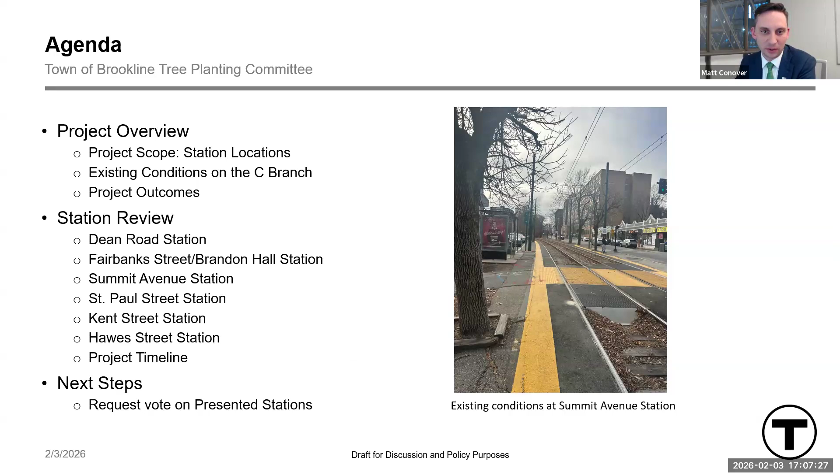As I mentioned, we were here back in the fall and presented the first 2 of the C Branch stations. Today we're here to present the same details on the remaining stations and to request the committee's approval. The MBTA has incorporated the lessons learned from the first 2 stations into the design of the remaining stations to ensure that the required accessibility improvements are made with minimum disruption to the existing environment.

Currently there are 9 inaccessible stations on the C Branch. Accessibility is a shared priority of the MBTA and the town of Brookline, which seeks to ensure a safe, livable community for all residents. The project will upgrade 9 stations, widening and raising platforms to meet minimum required accessibility standards. For those familiar with the service today, St. Mary's and Coolidge Corner are examples of stations that currently meet the accessibility guidelines I'm describing.

As part of this project, we will also combine Brandon Hall and Fairbanks Street stations into a single station, which will improve travel times and ensure that the new Type 10 trains can serve all stations along the branch. Lastly, we will eliminate Kent Street Station due to its proximity to Hawes and to further improve travel times. These significant improvements do require trade-offs, which our team has actively engaged with the town on. Working with town staff, elected officials, the public, and technical experts, we have gone through a series of options and refinements to balance these trade-offs and to develop a project that provides equal access to all and minimizes negative impacts to the maximum extent possible.

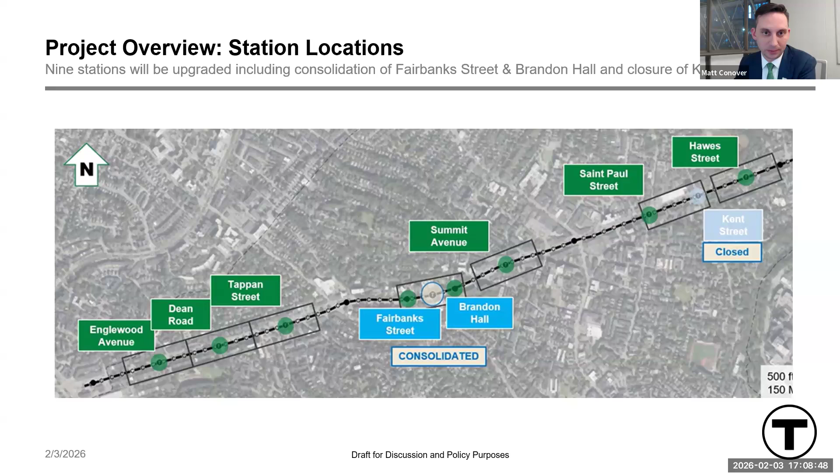For those familiar with the nine stations that I mentioned, the challenge of the existing conditions will be familiar. Our team has heard from numerous individuals who cannot access the Green Line from the station in front of their own home due to some of these challenges.

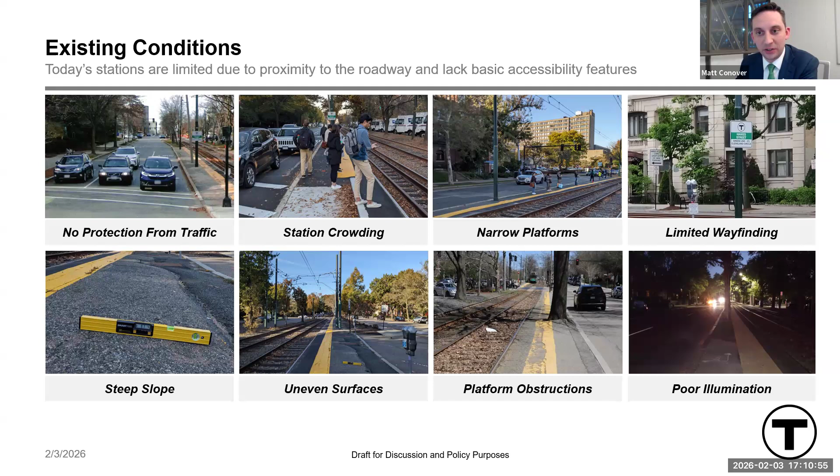This project will address the challenges that I just described. At the completion of the project, the entire C branch will be accessible. In working with the town of Brookline, we've designed a project that will preserve the look and feel of Beacon Street, which is a unique Brookline asset.

Through station consolidations, closures, and by shifting platforms to ensure accessibility and improve service reliability, the MBTA expects to see a 3 to 7% decrease in travel times. The project will bring improved wayfinding and lighting for customers.

In partnership with the town, we are minimizing the impacts to public shade trees, and we have developed a plan to replant consistent rows of trees along the Beacon Street corridor. We have done this by thoroughly vetting all station locations and platform sizing to ensure that the minimum number of trees are disrupted and the maximum number of trees are saved.

We've incorporated a row of trees, referred to as a tree lawn, at the back of the platform areas to eliminate impervious surfaces, reduce urban heat pockets, and provide a location for replanting along Beacon Street to create a consistent and evenly spaced row of trees where possible.

Lastly, in working with town staff and through various design changes, we have ensured that this project will not preclude the future bridle path, which I look forward to taking advantage of when I'm not riding the Green Line.

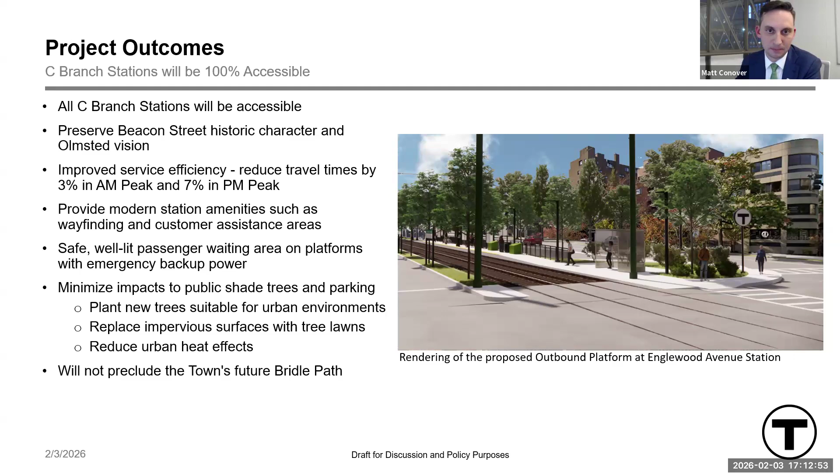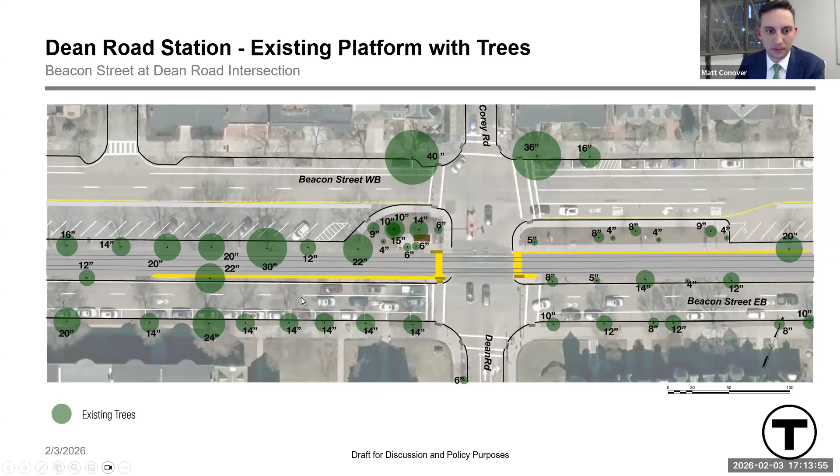As I'm sure many of you have identified, the platforms will impact a number of trees, most of which are on the new outbound platform side where it is being relocated. This is unfortunately necessary due to the hill present to the east of Dean Road.

One of the primary parts of making an accessible station is having an accessible path of travel. A big part of this is related to the slope of the path.

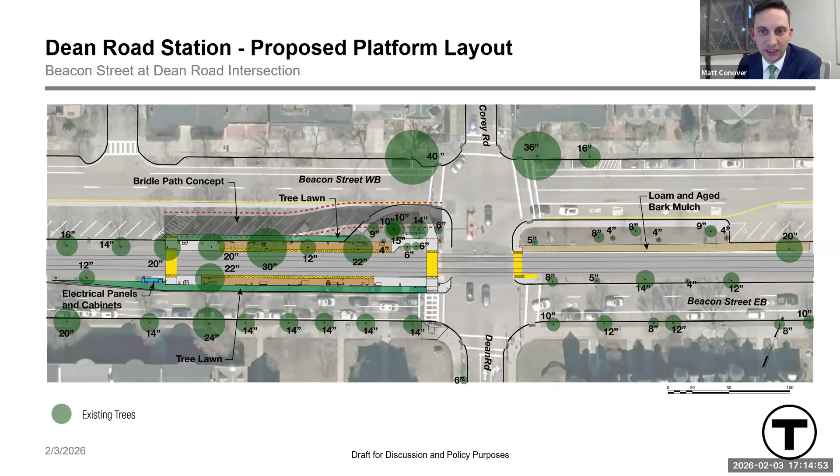The same situation is also present at St. Paul Street, where the platform can only achieve accessible slopes on the east side of the intersection.

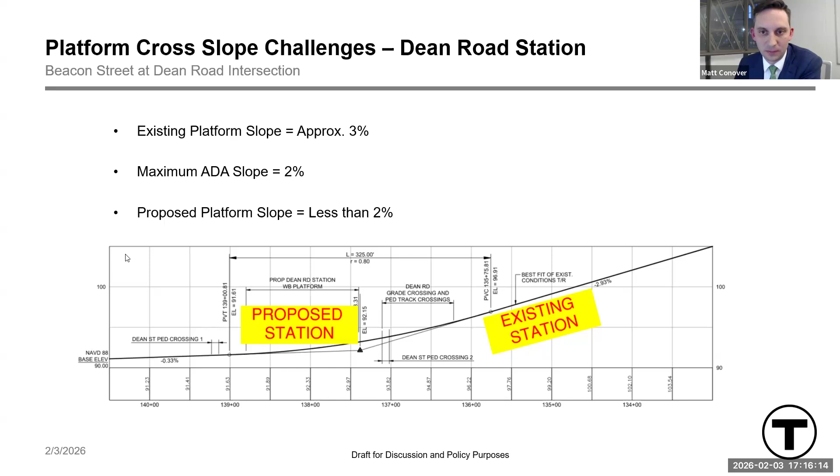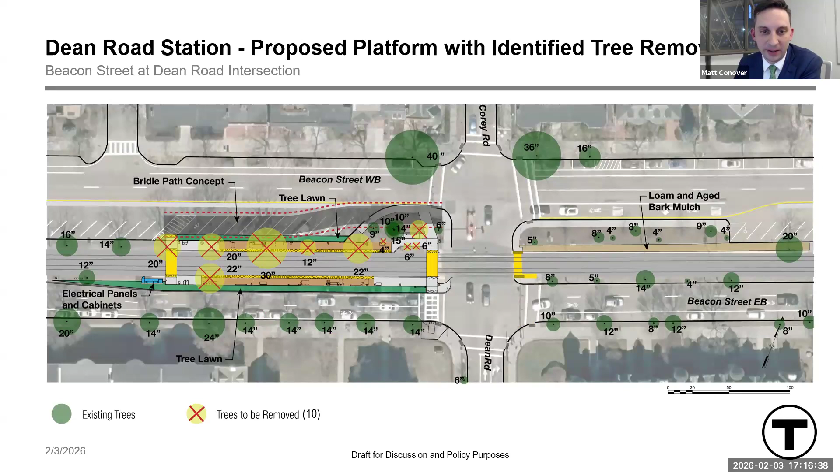The MBTA has committed to the town to do everything it can to maintain the character and green space along the historic Beacon Street corridor, and is hoping to leave the space overall better than when we found it.

Through close collaboration with the town of Brookline and their arborist, our team has developed a tree planting plan that is part of the presentation today.

In the area of the station, a total of 9 new trees will be planted. This includes a dedicated tree lawn along each platform to maintain the continuous green ribbon along the corridor. The drawing shows the canopy size of the trees after a few years of growth.

Then they will be turned over to the town of Brookline, as agreed upon, to become town assets. The new trees planted will be between 2.5 and 3 inches in diameter, as the project and town arborist have found that statistically, trees of this size have the best chance for success establishing themselves, and will often catch up in size to larger plantings fairly quickly.

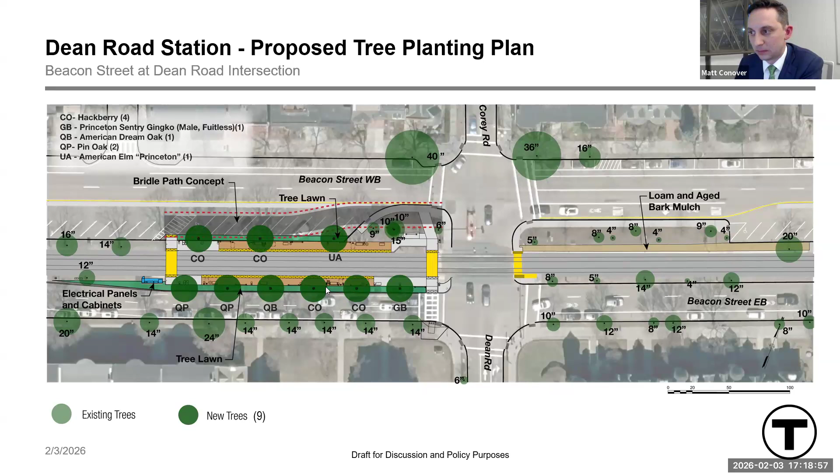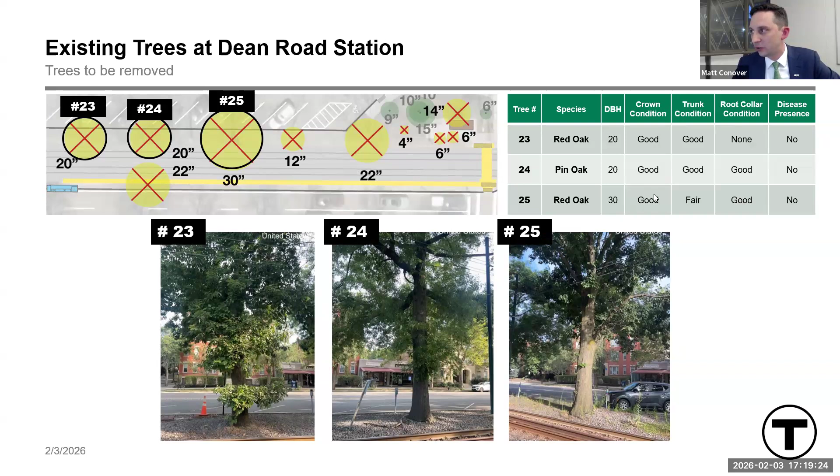Shifting down a little, we see 3 more trees, numbers 26, 27, and 29: 2 sycamores and a crabapple, ranging in size from 12 to 22 inches. All are in fair to poor condition generally, and some do have disease present.

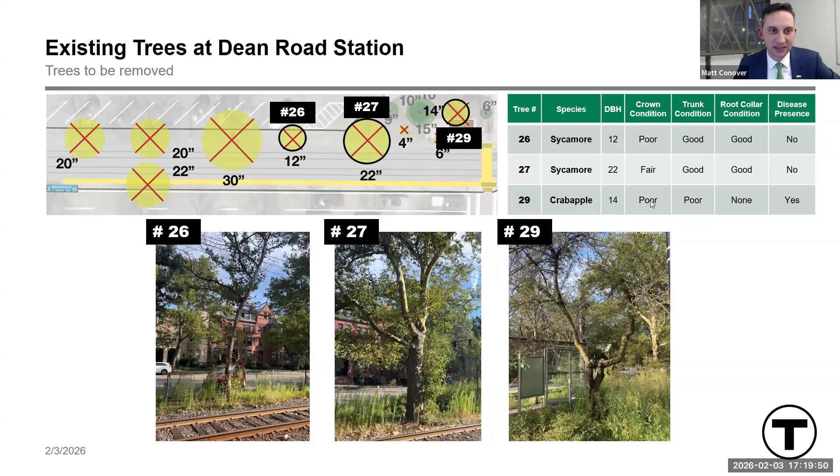Shifting again, we see trees number 31, 32, and 41: a Siberian elm, a pin oak, and a Siberian crabapple, ranging in size, 2 at 6 inches, 1 at 22 inches, 1 at 4 inches. One is dead, one is poor, one is good, and the other is to be surveyed in the near future for complete information. No disease present at this time.

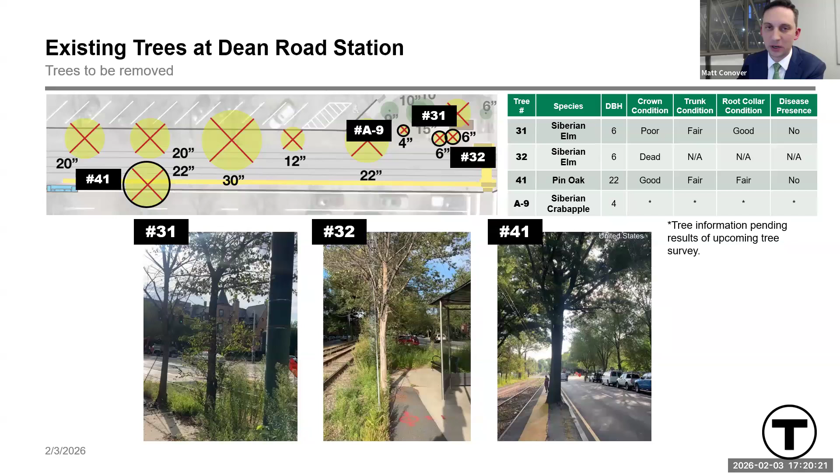With that, I'll move on to Fairbanks and Brandon Hall.

The next location is where Fairbanks and Brandon Hall stations are located. This location is a little different from many of our others, with a steep wooded slope to the northern side of the tracks. While not as close to traffic, these stations feature a smaller, thin strip of asphalt used as the platform. This adds additional challenges for providing equal accessibility across the station down this slope for those who live along the westbound side of Beacon Street.

Here's a top-down view of the area, Fairbanks and Brandon Hall stations. As shown, the stations are very close together, only a few hundred feet apart, with the wooded hill line and Beacon Street to the westbound side, to the north, and the angled parking along Beacon Street to the eastbound, and Beacon Street eastbound to the south.

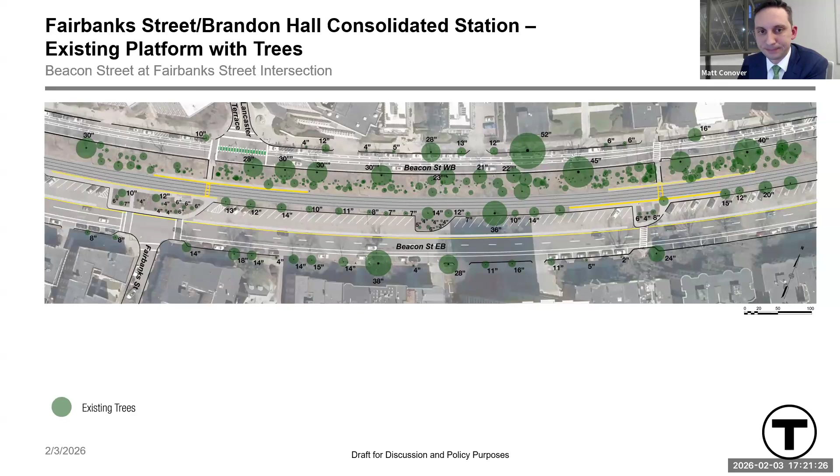In maintaining this, we'll provide equal access to the new accessible ramps, which will be installed adjacent to the existing stairwells and down the slope from Beacon Street westbound.

The project team worked hard with the town to find a configuration that worked for these ramps and minimize the overall impact to the trees. They reviewed dozens of options, including which side the stairs should be placed on, how long and wide the ramp should be, keeping towards the top or bottom of the slopes, using ramps instead of slope walkways, and different foundation types.

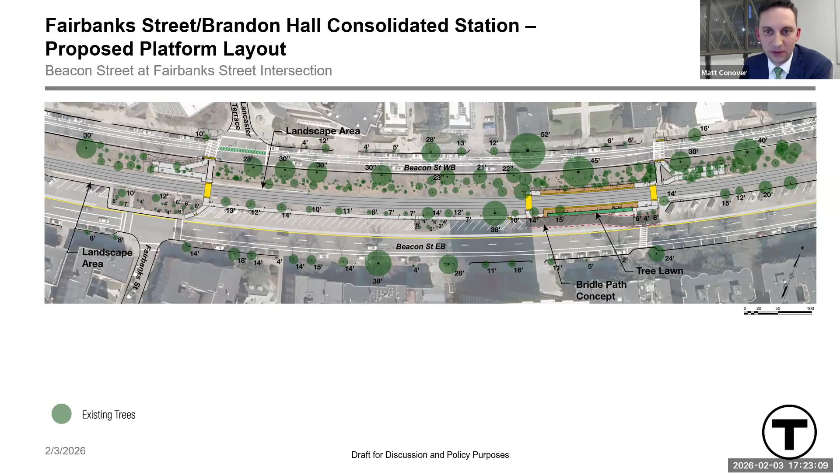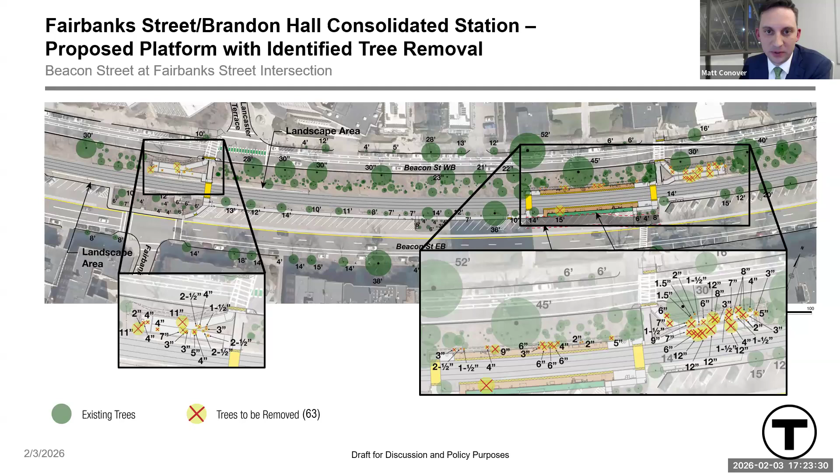The next slide focuses on the trees that need to be removed as part of this project. A total of 63 trees are impacted by the new infrastructure, although most are smaller, sapling-style trees. These are located in areas where the ramps need to be located, as well as the platforms.

17 new trees will be planted, as shown here in the tree lawn on the south side of the new platform, and in the areas where the old platforms are being removed. As before, the species of the trees are shown at the bottom of the frame.

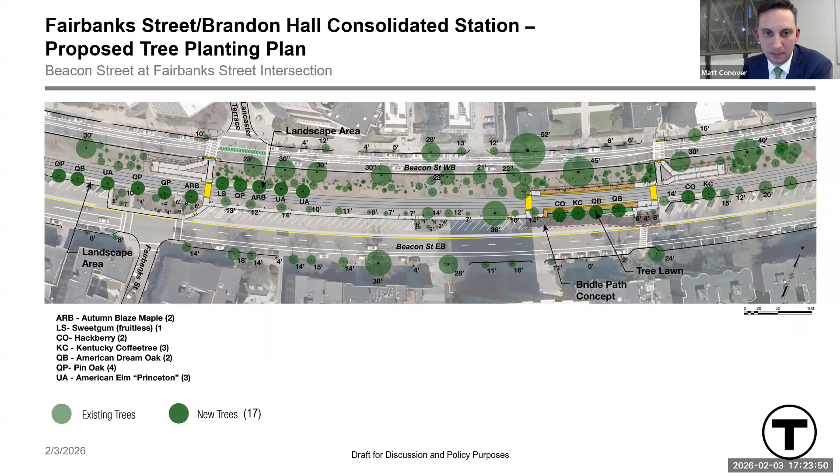Focusing on the specific trees being impacted, we'll start with the trees in the area of the ramp near the current Fairbanks station. Mostly small oak trees that have grown from acorns falling from the nearby larger trees. Looking at overall size, 4 inches is the largest, down to 1.5 inches. They are in good condition with no disease present, but again, these are mostly saplings that have sprung up from the existing larger trees in the area.

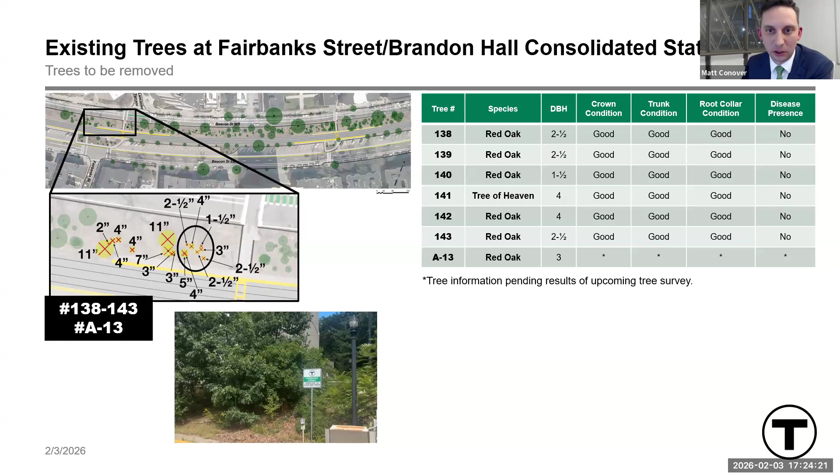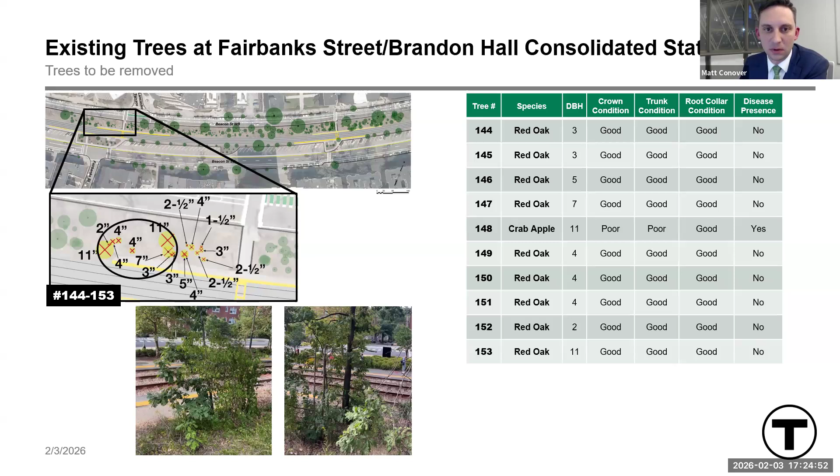In the easternmost part of the station upgrade, we have the trees impacted by the Brandon Hall ramp. Starting towards the east, we have a group of mostly red oaks, as well as some other saplings.

Looking at the size and condition of those, they vary in size, with the majority being 6 inches or less. One is 15 inches, one is 9 inches, worth calling out—the one at 15 inches is in fair condition but does not show current signs of disease. The majority of the ones tagged and identified to date are in good condition.

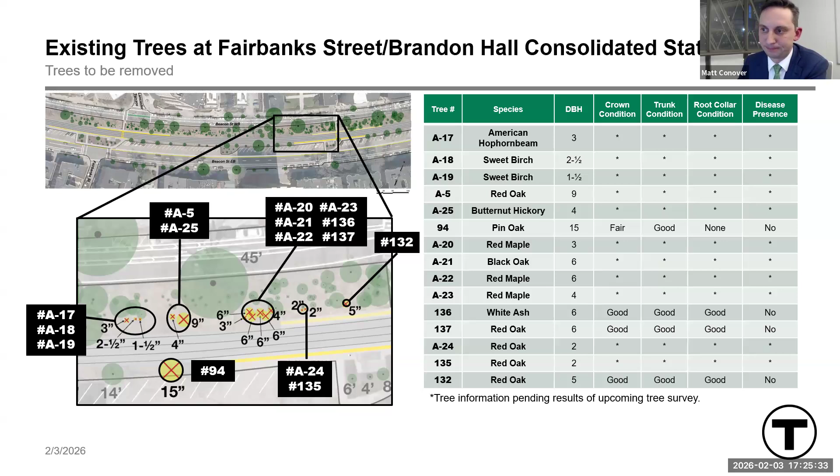Then we move on to the western side of the ramp, where we have the remaining trees, which are mostly small oak trees grown again from acorns dropped by the larger oaks in the area. The majority, again, are under 6 inches.

Well, Gwen made it off the train, so let's give a round of applause. I'm going to hand it over to her because she'll do a far better job. Thank you, folks, for bearing with me. I'll turn it over to Gwen.

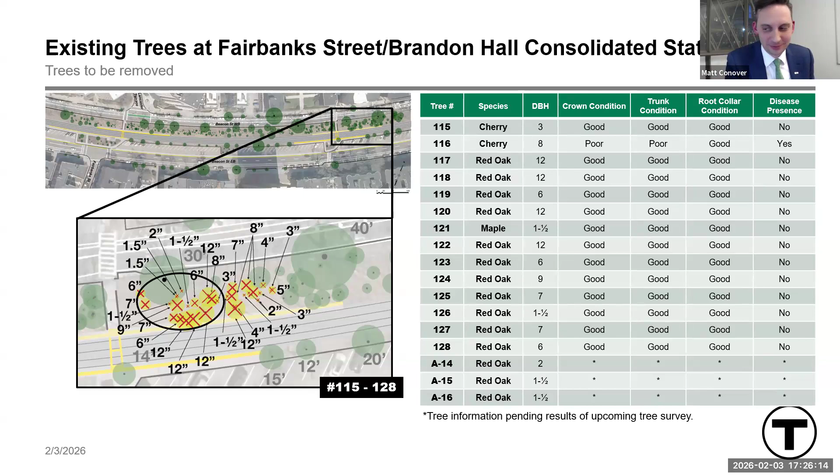Thank you, Matt. Hello, everyone. Thank you, Matt, and thank you for covering for me. As much as we love the T, it is not always perfect. Today, some signal issues apparently stopped my train, and I had to switch to a bus to get home, which is fine because we like buses too.

Jumping in where I think Matt left off, we are at the eastern area of Fairbanks Street and Brandon Hall. Here we have a number of trees impacted by the ramp at the Brandon Hall set of stairs. As shown here, quite a few trees are impacted, although most of them, like the other trees at this station, are smaller oak trees fallen from the bigger oak trees nearby.

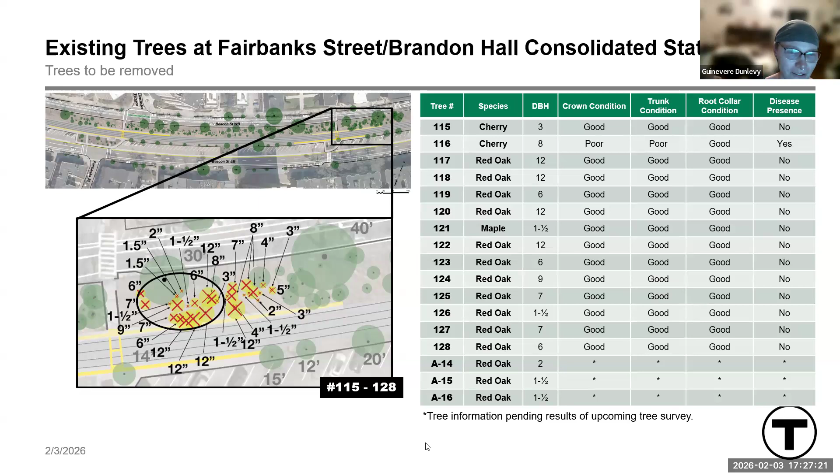The biggest of these trees is 12 inches, although most are less than 6 inches, with some as small as 1.5 inches, as we are categorizing them.

Lastly, we have a rendering of what the future station could look like. The tree lawn is in the foreground with the wooded hill in the background. To the right, we see the electrical panels that power the station.

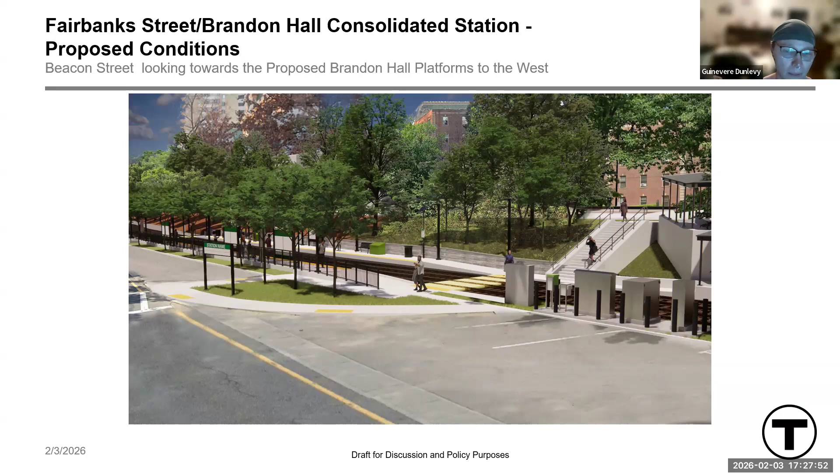The design team is still iterating on the design to find ways to reduce the amount of equipment required to power the station, and if we have updates, this number of panels will go down. Accessible crossings, station amenities, and wayfinding signage are also all shown here.

Next, we have Summit Station. Here we have the existing conditions, similar to the other stations—narrow platforms tight against the street on one side and angled parking on the other.

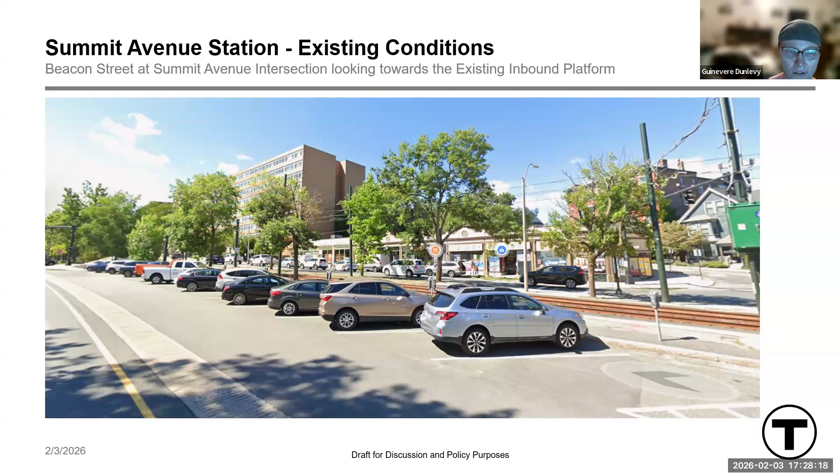Moving to the overview, currently the platforms are staggered, with the inbound beginning right at the Marion Street intersection and the outbound starting about 100 feet west, closer to the Summit Ave intersection.

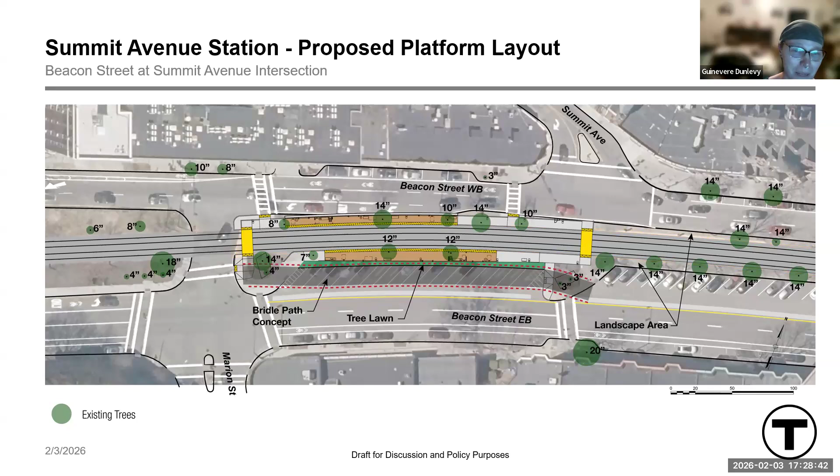In the proposed station platform, both will be located between Marion and Summit to minimize impacts to trees, but also to the parking in this busy commercial area.

I'd also like to point out that although we can fit a tree lawn between the platform and the angled parking to the south of the station, due to the well-used left turn lane, there is not enough room for a tree lawn on the north side without taking a lane of traffic away, which is not something we want to do. At this location, there are 8 trees that will need to be removed to accommodate the improved platforms.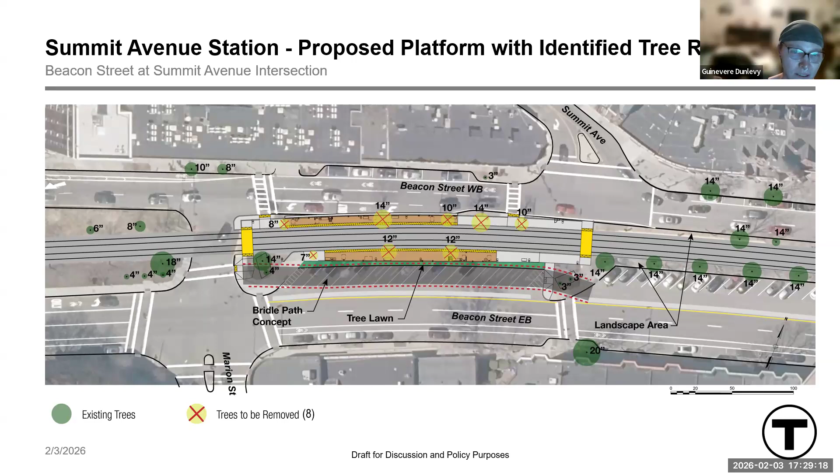These removals are split between the inbound and outbound platform areas, varying in size from 7 to 14 inches. In the proposed conditions for the new station, there will be 8 new trees planted, located mostly in the tree lawn, but some will also be positioned where the older portion of the station will be removed.

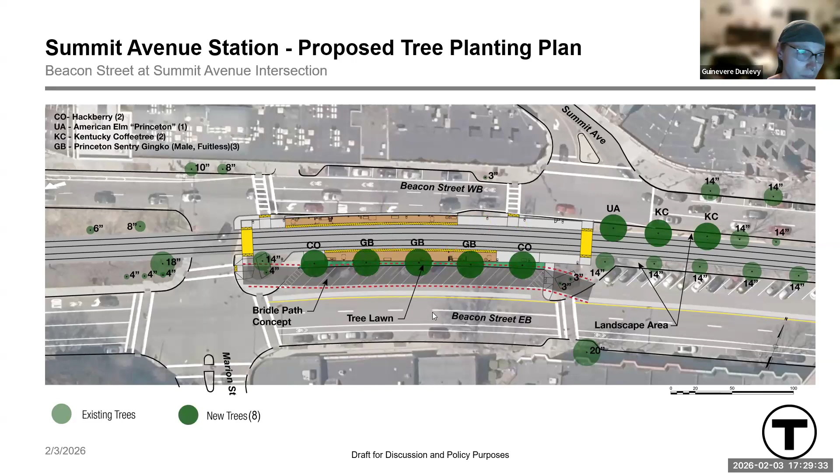Some new trees will also be positioned where the older portion of the station will be removed. The selected species are again shown in the top left corner of this slide for those interested.

Moving to reviewing the individual trees impacted, we have our first 3 here: 2 green ash and a sweet gum, between 10 and 14 inches. The green ashes are in fair to poor condition. The sweet gum is in good condition.

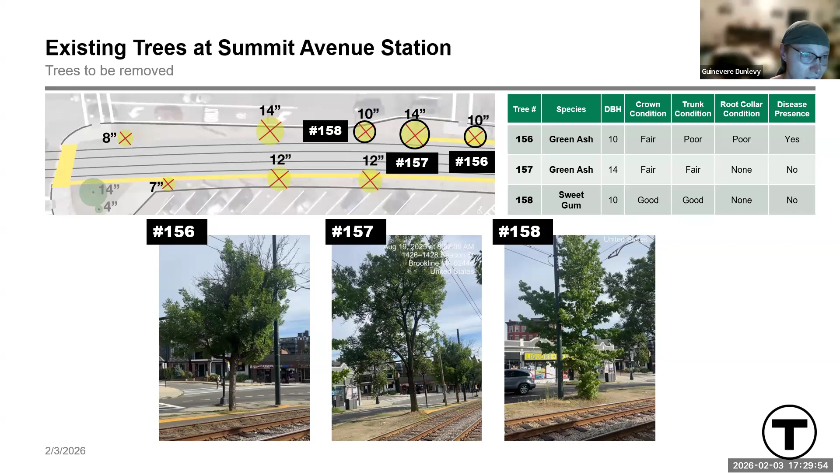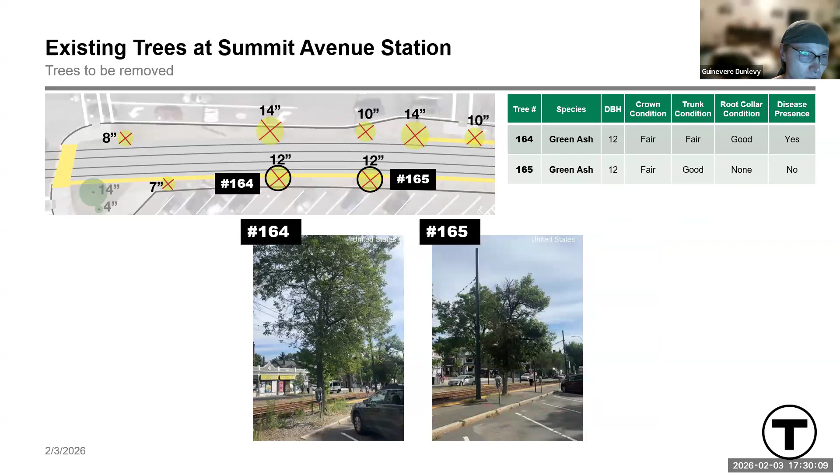And lastly, we have 2 more green ashes in fair to good condition, both 12 inches in diameter.

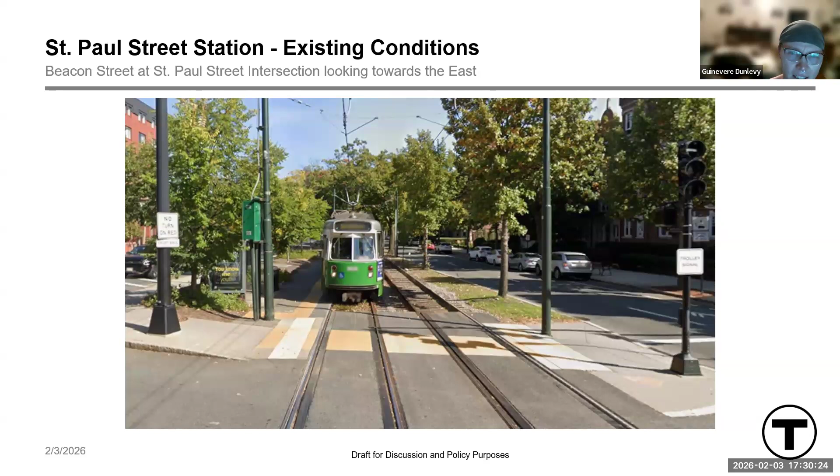St. Paul is the next station we will review. The existing condition photo shows the outbound platform on the left side. This, like the other stations, is comprised of only a thin asphalt landing.

In the overview shown, St. Paul is pictured from above. The station is currently split across the intersection, with the outbound platform on the east side of St. Paul Street and inbound on the west.

As mentioned earlier, this is a station where one side of the intersection has a steeper slope than the other. This requires both platforms to be located on the east side of the intersection, shown in this proposed configuration.

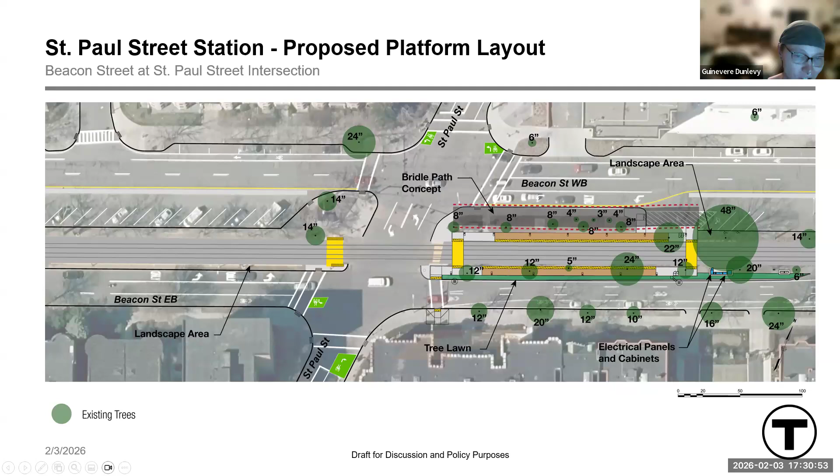This layout requires removal of 6 trees from 5 to 24 inches in diameter, mostly where the new inbound platform must be located due to the accessibility need.

Fortunately, this leaves ample room for new plantings, both in the new inbound tree lawn and where the old inbound station is being removed, for a total of 15 new trees at this location.

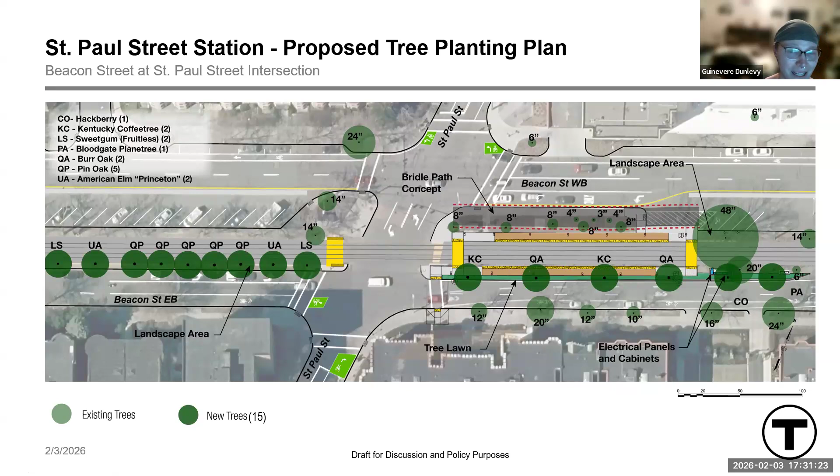This layout also allows us to maintain the tree planting area north of the outbound platform and keep those 8 trees that are already there.

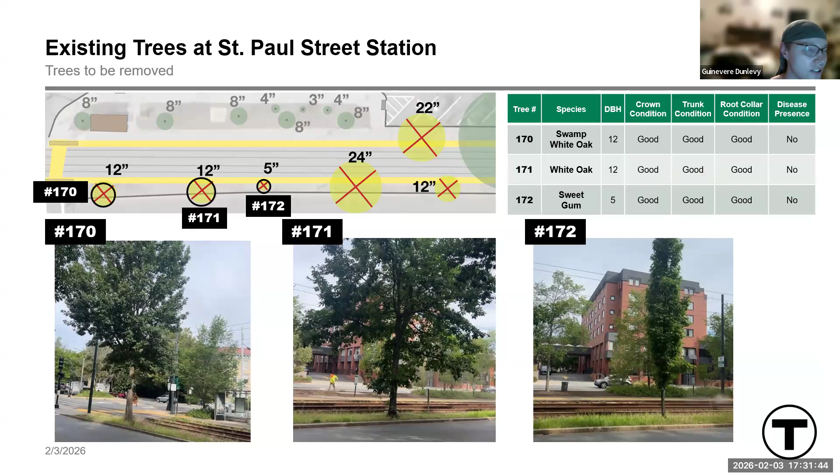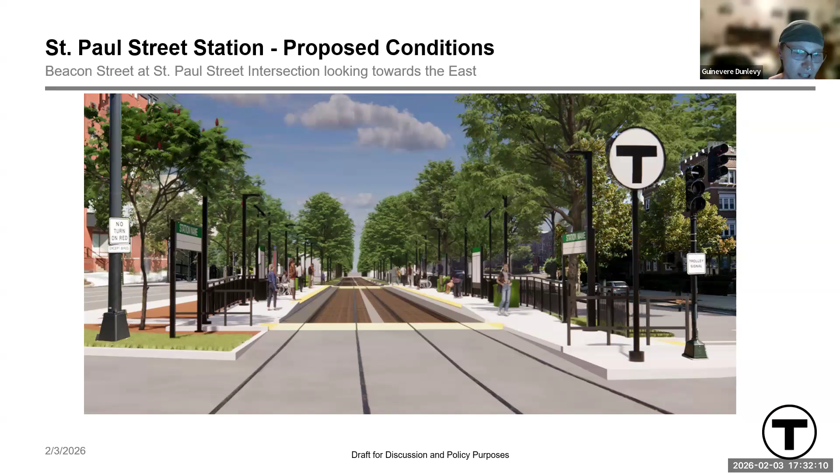Lastly, we have a rendering of St. Paul and what the future station layout will look like. This is typical of most of the stations on this line, with 2 accessible raised platforms, new signage and amenities, green space behind the platform, fences, and accessible crossings.

Kent Street is the one station that will be fully closed through this project. Its existing conditions are similar to the other stations, but this one stands out due to its low ridership and close proximity to the other stations, with its inbound platform located in the same block as St. Paul Street Station and its outbound platform located in the same block as Hawes Street. The existing station is split across the Kent Street intersection, inbound to the west and outbound to the east.

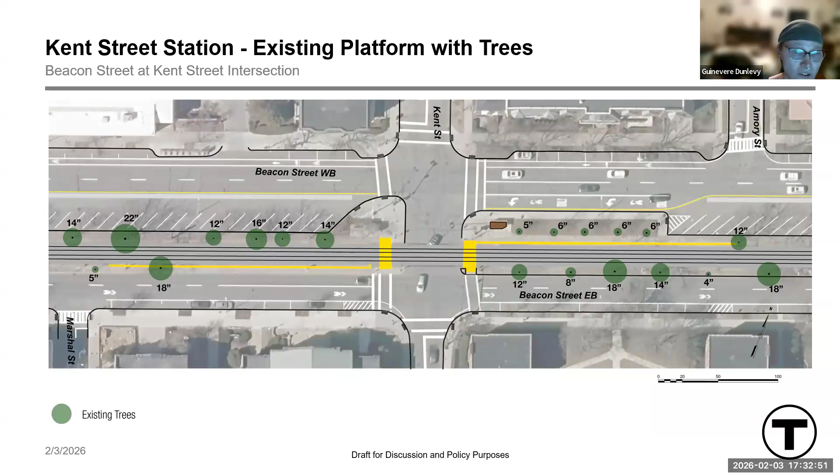Once the work here is done, the asphalt platforms will be removed, as well as some of the concrete landing areas used to access them. The town sidewalks and crossings will be maintained, though.

The removal of the platforms does not require the removal of any trees, but does allow space for new tree plantings, especially on the west side of Kent Street, which did not have many due to the platform being there. 6 new trees are planned to be added here, with their types shown in the top left corner again.

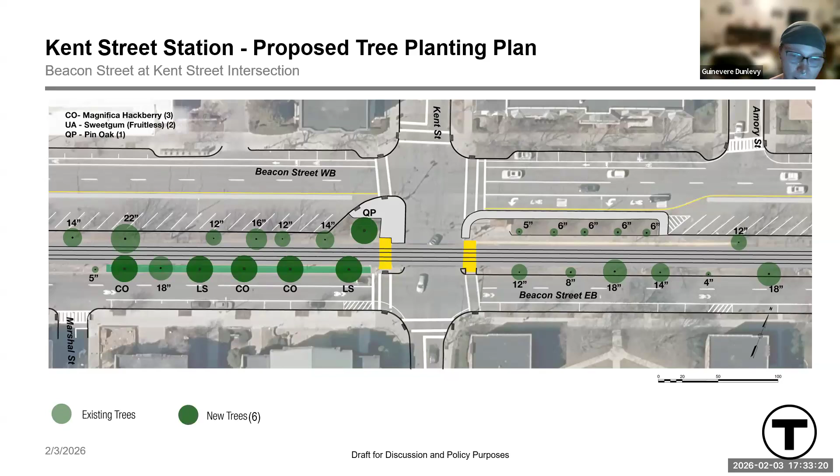And lastly, we have Hawes Station. Shown here, the station has the same narrow and inaccessible platforms currently common among the line, with only a narrow space between the tracks and street traffic, often with light poles or other obstructions in the path of travel.

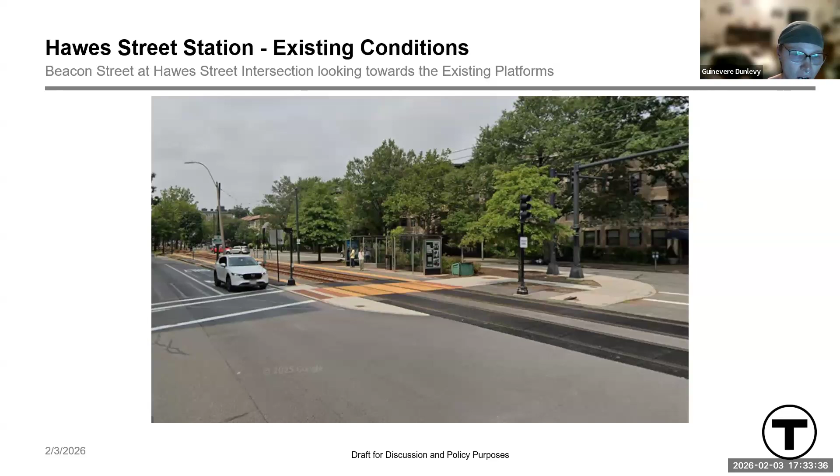In the current configuration, both inbound and outbound platforms are on the west side of the Hawes Street intersection. In coordination with the town and MassDOT, the decision was made to keep both platforms to the west of the intersection. This change does require removal of the U-turn lane on the eastbound side of Beacon Street to allow for the wider platform.

A traffic study was conducted to determine the impacts of this, and it was found that due to the low use of the U-turn lane and the nearby options for other paths, this was acceptable to close.

And in doing so, this saves multiple on-street parking spaces and the 32-inch tree shown on the far right side of this picture. This choice allows the station to be constructed without removing any trees at this location.

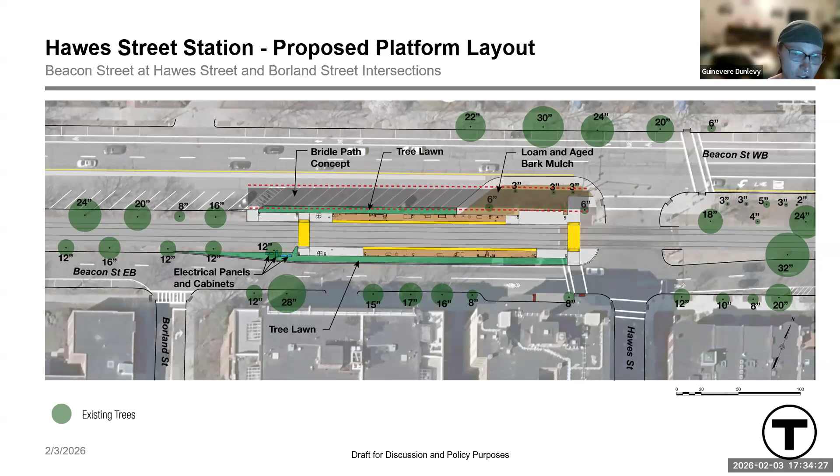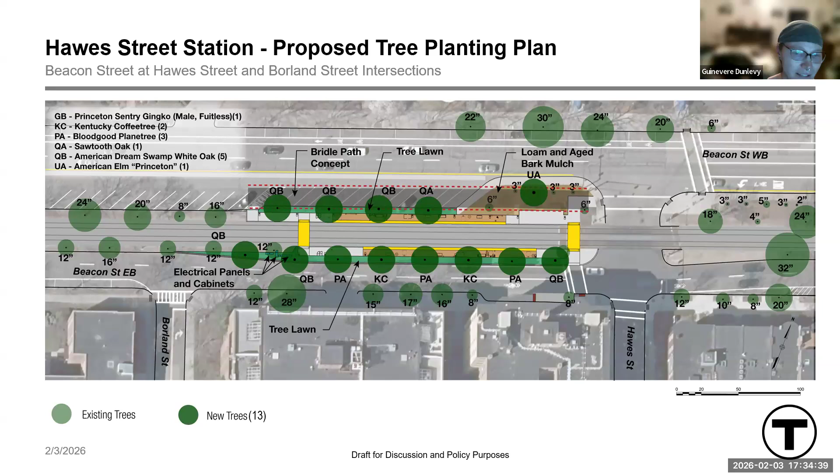New tree lawns will be installed, providing more trees here in an area that currently does not have many. Shown are the 13 trees the project plans to add to the station area between the inbound and outbound tree lawns.

I know that was a lot, and thank you for bearing with me as I went through all of that, and Matt went through a lot of that too. So thank you, Matt. I'm going to turn it back to him to summarize everything we talked about and what's coming next. I'm noticing a trend here where I talk too much. Well, it's supposed to be the other way around, you know.

So I was supposed to have a nice easy summary, which I'll step through just as a quick reminder, because that was so much information that we covered there.

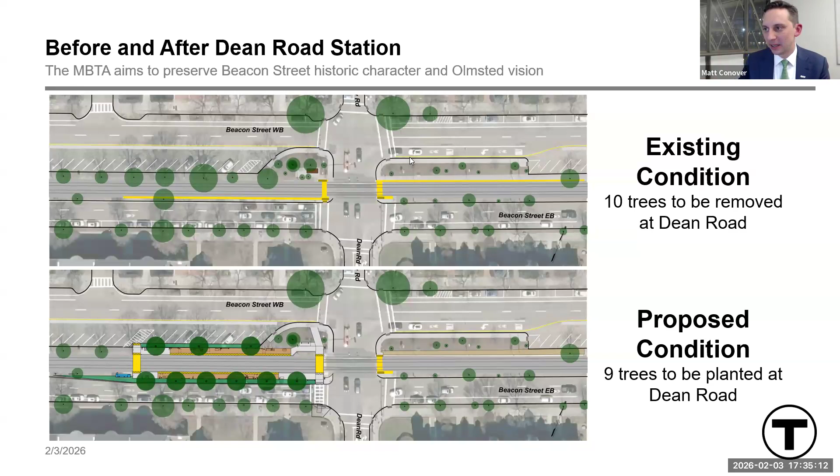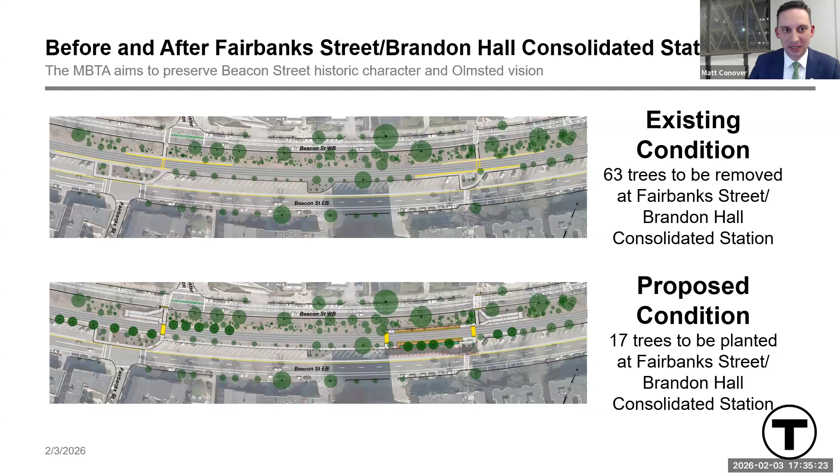So at Dean Road, 10 trees are removed and 9 trees are to be replanted. Moving down, at the Fairbanks Brandon Hall area, 63 total trees will be removed with 17 replanted, but as a reminder, many of those were young trees, many saplings in that area that I described. At Summit Avenue, 8 total trees are to be removed and then 8 total trees replanted in their place.

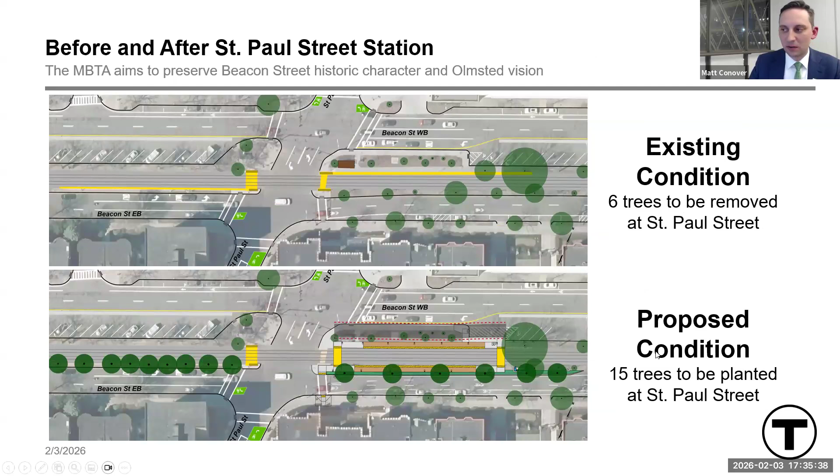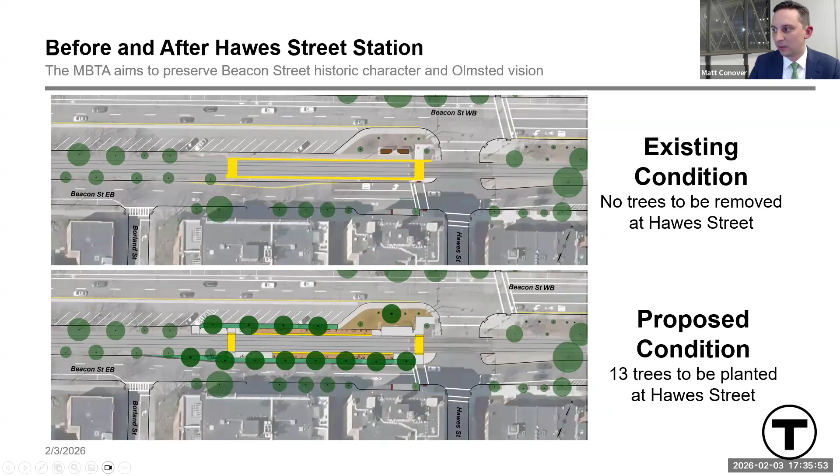At St. Paul, we have 6 trees to be removed with 15 replanted. At Kent, we have no trees impacted, but we are able to add 6 trees based on the removal of those platforms. And at Hawes, again, no trees are impacted, 13 are replanted.

Following extensive design review and a tree-by-tree field assessment, we've determined that 50 young trees and 46 mature trees must be removed to deliver these critical accessibility improvements to the C branch. This decision comes only after exploring all revisions to optimize our design and to ensure that the minimum impacts occur to the trees along Beacon Street.

In addition to the trees that we saved through these careful design choices, we are committing to planting 98 new trees on Beacon Street, with the possibility of increasing that number based on funding that the MBTA has specifically dedicated for new trees as part of this project. We are dedicated to ensuring the C branch is accessible for everyone while remaining a green and vibrant part of the neighborhood.

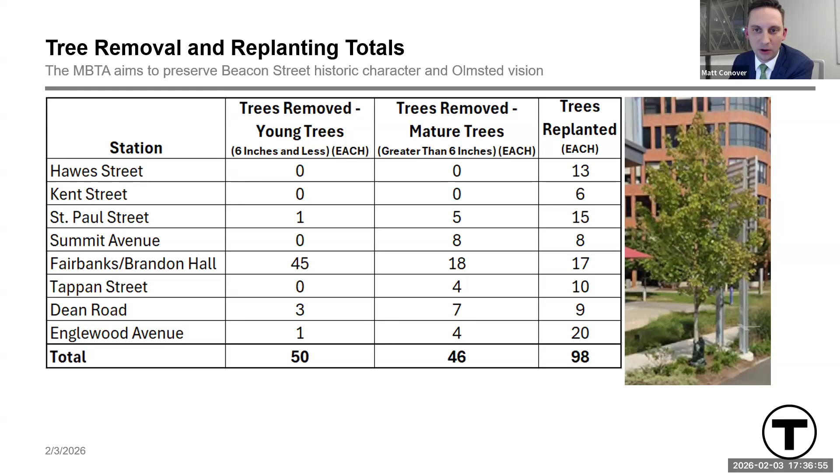In addition to planting new trees, the team is committed to ensuring that the existing trees in the vicinity of the work remain healthy. To safeguard trees during construction, we will implement protective protocols approved by the town's arborist. These include shielding trunks and roots with durable corrugated piping and installing dedicated fencing to separate active work zones from sensitive root systems. In current station locations, asphalt will be removed using hand tools to protect the trees and their roots that are to remain. The MBTA is committed to using the correct protection methods based on the site-specific location and the arborist's guidance.

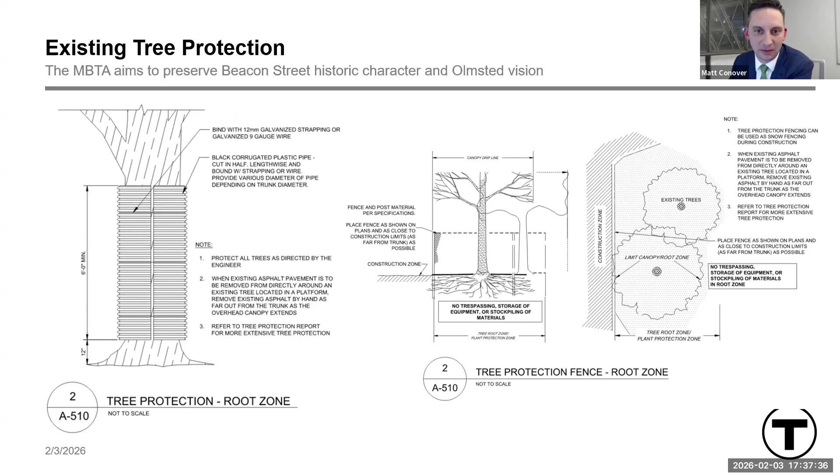This project has taken a significant amount of work from both the MBTA team and the town of Brookline. This effort and collaboration started in 2022 during the initial design phase. We've held numerous engagements throughout the design effort, including open houses, various presentations to town committees, as well as our MEPA outreach. Our next scheduled presentation will be at the Brookline Commission on Disability this February 11th. Once underway, the project is anticipated to move relatively quickly, reaching substantial completion by the end of 2026.

That concludes our presentation. Thank you for your time and attention, and Gwen and I are happy to answer any questions.

Thank you very much, Matt and Gwen. That's a lot of information, but really helpful the way that you covered it. I will attest that there has been a lot of back and forth with the town and the MBTA to get to this final plan.